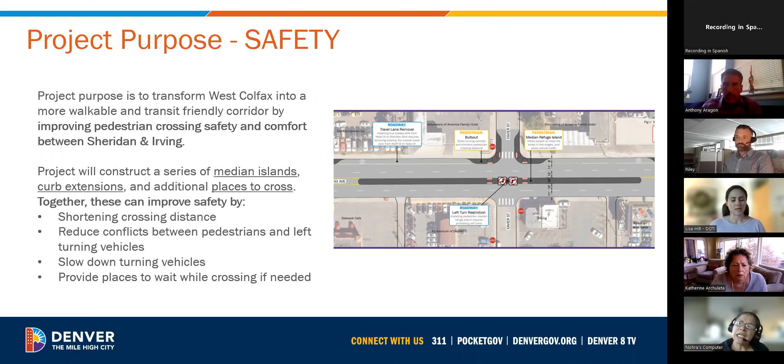All right, thank you, Lisa. Just double checking, did you want me to cover this slide as well? This was not one of the safety slides. Sorry, Mike, I thought you were going to go over that. I'll take it from here, I've looked at it so I can handle it. I'll apologize, I'll take it, sorry about that.

All right, yes, thanks, Lisa. My name is Mike King, and I'm on the Vision Zero team here at DOTI. For those that don't know what Vision Zero is, it's the goal of zero fatal and serious injuries on our streets by 2030. I'm sure you've seen the logo down in the corner there on many of our projects, and this is a project that is very much a Vision Zero project.

Right now this area is rapidly growing, and past community plans have called for a pedestrian-friendly walkable Main Street. Those being the NTMP projects, the neighborhood transportation mobility plans, and then the community transportation network projects as well. A lot of these area plans really focus on West Colfax as a major connection for the pedestrian network. We know there are schools, senior housing, residents, and businesses located along this corridor that generate pedestrian activity, as well as other roadway users.

And again, West Colfax is part of Denver's high injury network. High injury network being where 50% of our serious and fatal crashes happen across our city, while they only represent 5% of our total mileage across the city. So a very big difference there.

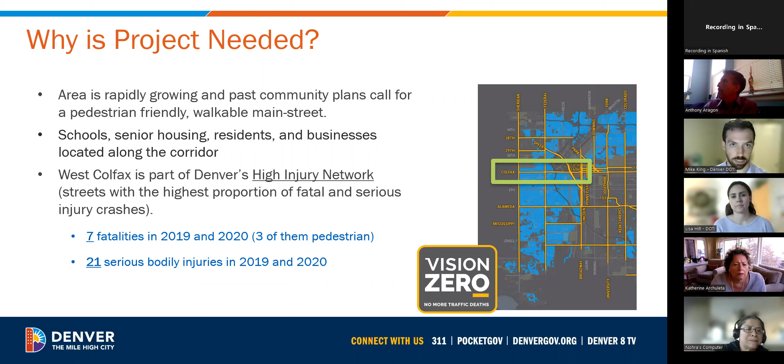Just a couple quick stats here, and then we'll get into the meat of the crash analysis. There have been 7 fatalities on this corridor in 2019 and 2020, 3 of them being pedestrian, and then 21 serious bodily injury crashes in 2019 and 2020. A serious bodily injury crash, for those that aren't aware, is a crash that usually results in hospitalization.

So again, this being a pedestrian project, we always want to make sure that we're focusing on pedestrians first on this type of project, but we also look at all roadway users.

Typically, when we do Vision Zero projects like this, if we see a specific intersection where there is a big issue, we would do a spot treatment. But because this is a full corridor trend where there's really almost a crash at every intersection, we want to do a full corridor analysis and a full corridor improvement.

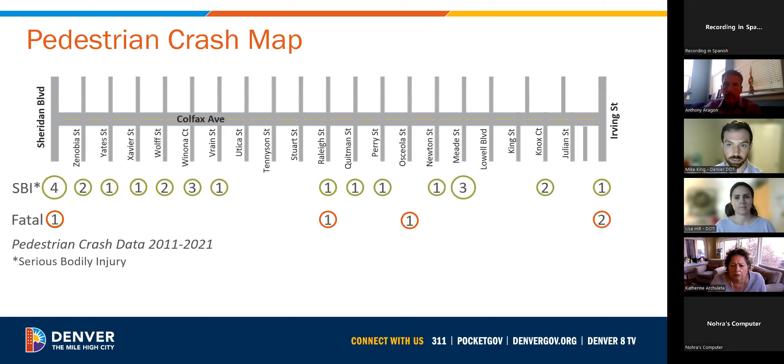Looking again at that larger crash picture, not just pedestrians, in that 2019 and 2020 window, there have been 131 total correctable crashes. A correctable crash is something that we could do engineering-wise that would eliminate or reduce this crash from happening in the future. Of those 131 total correctable crashes, we've seen 12 serious bodily injury and fatalities in that window, which gives us almost a 10% rate of crashes resulting in serious or fatal injuries. That is by far the highest rate in the city.

First, second is the federal stretch that we're doing a lot of projects on, and third is along Broadway, not Colorado Boulevard.

But just to break down this project specifically, there's been 94 vehicle-to-vehicle crashes, 14 pedestrian crashes, and 3 bicycle crashes.

I think this is our final slide for the crash picture, and then we can open it up for some questions if there are any about the crash picture.

This is just a snapshot of a specific stretch of the corridor. We do an analysis like this for all of our projects prior to determining what the best design treatments are. As you can see, we'll start from left to right, just what the crashes were that occurred in this stretch from Stuart to Quitman.

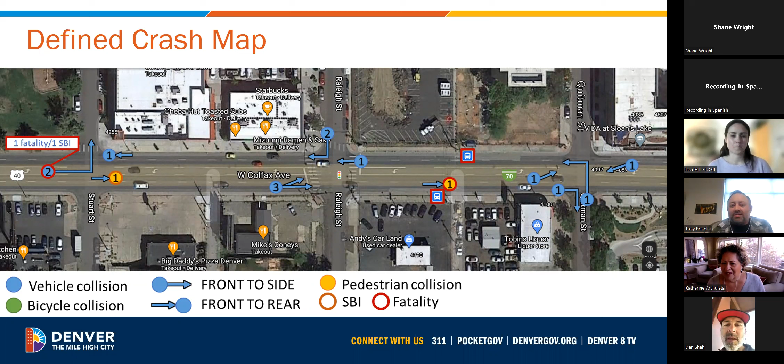Just in the interest of time, I'm going to move us on to the next slide because I know we have a lot to get through.

Shane, did we answer your question? Yes, thank you, I need to unlower my hand now. Okay. Thank you. All right, Mike, are you continuing? I'll pick back up. Okay, thanks, Lisa. Thank you, Mike, and sorry for putting you on the spot there.

You did great. So I just want to go over our timeline for this project again and remind everybody, this started planning back in June of 2019. We had public meeting number one, came out to the community to present the project, got some feedback. We developed a concept design in the middle of 2019. Came back to the public again in September of 2019 with another public meeting, got the remaining feedback, which was the basis for starting this project we're going into now.

In 2020, we got our remaining funding. Originally, our funding for design has come from the Elevate Denver Bond Initiative. Back in 2017, Denver citizens voted on funding safety and transit projects along West Colfax, so that's where funding came from through the Elevate Denver Bond Program. Then in 2020, the remaining funding was contributed by CDOT through their Safer Main Streets initiative. We applied for a grant and got a match from CDOT, so another partnership going on.

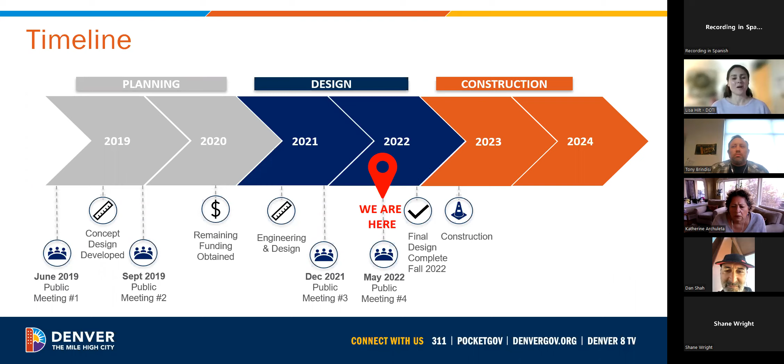This kind of put a little bit of a wrench in the Vision Zero project, and Mike's going to talk about that more later. Just the timing of the two projects doesn't quite line up now with our expedited schedule. It's great for the project, but our interim project kind of put a wrench in that.

So the key public input we heard from you all is that you had some concerns about pedestrian crossing safety at Corky Gonzales Library, Colfax Elementary, Newton and Vrain Streets. I want to point out at Irving Street, we're adding bulb outs. The project ends at the west side of the intersection of Irving and Colfax, and we're adding bulb outs there to help lessen crossing distances, which should improve safety.

Our other group had already implemented LPIs, lead pedestrian intervals, at the traffic signal intersections. That means the signal turns red, pedestrians get the walk signal to cross, and it takes a while for the green light to turn.

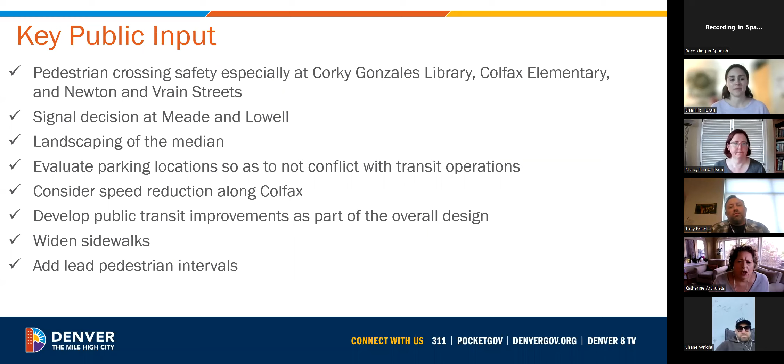Lisa, there was a question from Jerry about left-hand turns allowed at Lowell. It might relate a bit to the earlier conversation, but maybe you could address it now. I was just going to say we have a slide on that later, Katherine. Okay, great, perfect. I'll probably address a few of these comments at that point, and we can always go back to them if we don't cover enough detail. And thanks, Shane, for your comment about feeling great on the landscaping.

I had one question about the process. There are a number of things you've done over time that have been responsive to input from the BID and its members. But one thing we asked about was having speed indicator lights or signs that tell people how fast they're going, for that instant recognition that you need to slow down. I wondered if those had been incorporated into your design.

Thanks for the question, Dan. I think we've covered this before. Those aren't part of our design, and I believe that's something that has to go through DPD. Maybe Tony can speak more on this. I can speak a little to that, Lisa, though probably not too in depth right now since it hasn't been part of this discussion or design at this point.

There is a process to go through. DPD essentially has to make certain requests in alignment with the red light cameras on CDOT right of way. Certain things right now aren't really allowed, like the feedback signs, is kind of what they are, Dan.

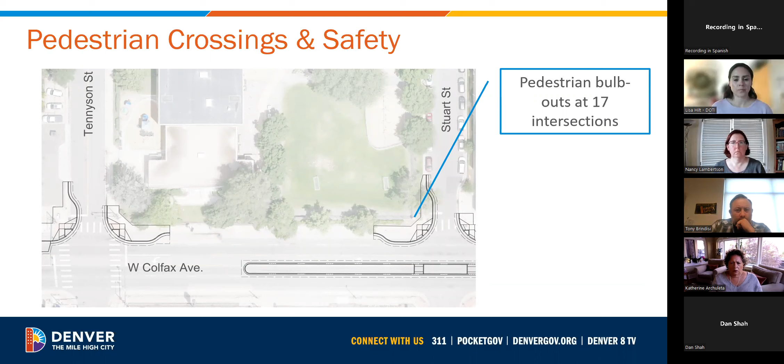We are adding 8 new landscape median refuge islands, and with this we're preventing over 60 left turn conflicts between pedestrians and vehicles. So this is a great safety tool.

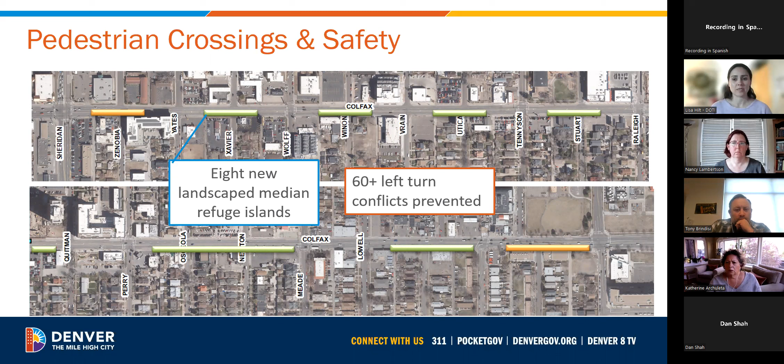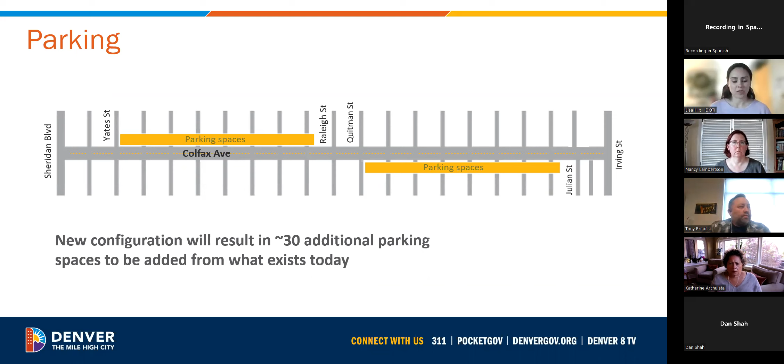We'll also be adding about 30 additional parking spaces from what exists today. So you can see it starts on the north side from Yates to about Raleigh, then there's a transition, and then we have parking spaces on the south side. We'll be adding parking to the area, and I think that will help people get to where they need to go, and businesses as well -- added parking for businesses.

Just a reminder of our transit improvements: we are also adding bus bulb outs, which will create additional waiting areas where we add the bus bulb-out stops. This will consolidate and reduce travel time for transit. And we have traffic signal priority, which gives special signals to get buses through the corridor more quickly. So that's a big benefit to keep people on time, keep the buses running, and keep things moving.

There was one question from Kathleen that may be relevant to this slide: she's asking if there will be relocation or removal of RTD shelters that are no longer at bus stops, and whether anything is being done to ensure businesses are diligent in removing snow from sidewalks during the winter months.

Sure, as far as RTD shelters where we're consolidating bus stops, yes, I believe those will be removed. And as far as diligence in having businesses...

Lisa, just start, go ahead. Yeah, I just wanted to interject on the bus shelter.

Those are all actually Business Improvement District shelters, so we've been coordinating with property owners, RTD, the city, and Riley to move them. There's actually one currently orphaned at Irving because they eliminated the 16L, but we do have plans to relocate that one and also the one at Raleigh eastbound. Those shelters will be moved so they're no longer serving no purpose. The one at Raleigh will move over in front of the McDonald's. The one at Irving will move to the other side of Irving, on the west side, in our landscape area, once the bulb out is built there.

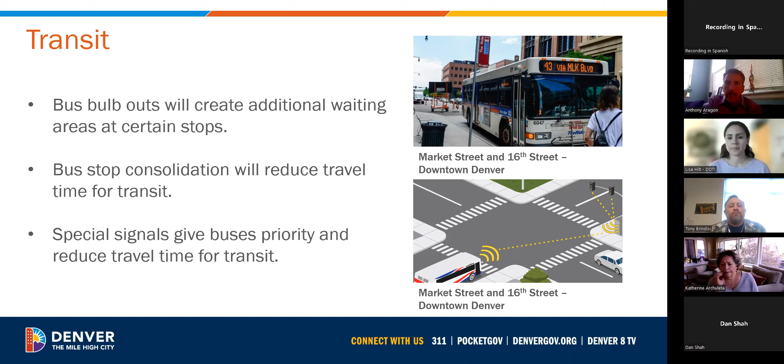The question was how does parking work with BRT or regular movement along the outside lanes. In areas of the street where there is on-street parking, the bus is able to stop at one of the bus bulb outs and not have to pull out of traffic, which reduces delay. Transit operations sometimes see delay when they have to pull out of traffic and pull back in, so the bus bulb outs will benefit that.

As far as BRT goes, which stands for Bus Rapid Transit, right now what's being done as part of this project are improvements to make transit quicker. It's not full bus rapid transit yet; that's planned for the future. When that does happen, it would likely remove one of the travel lanes, similar to what's happening on East Colfax, where you'd have a vehicle lane and then a dedicated lane for bus operations.

On the snow issue, I want to jump in because one of the reasons the on-street parking was moved and shifted, starting at Perry, was to mitigate the splashback onto the south side businesses. It becomes hard for those business owners to keep things ice-free when there's splashback. By having parking in front of the businesses on the south side, for example across from the Rose Lady, it'll be easier for them not to deal with constant splashback of ice and snow, and easier to maintain the walks in a safe condition.

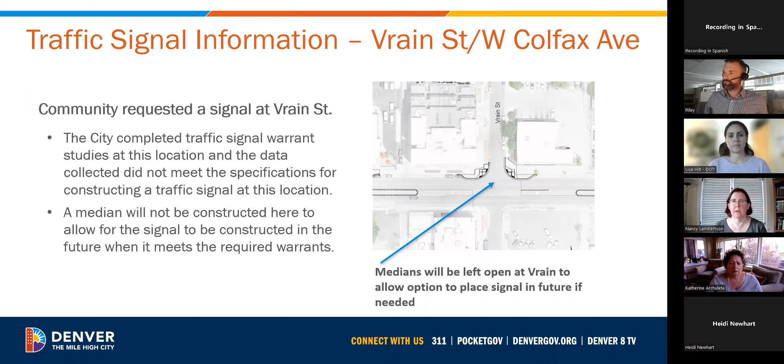Same thing at Lowell, same issue as at Vrain, where people were asking to relocate the signal from Meade to Lowell. The city typically doesn't do that because of the potential to damage the signal. Once again, it did not meet warrants, but DOTI is committed to monitoring these locations to see in the future when they should be installing signals.

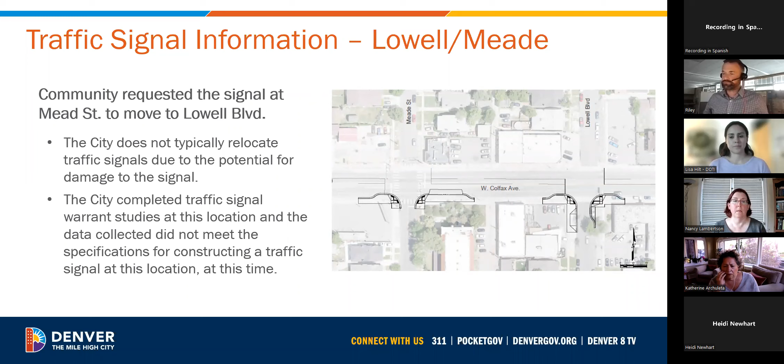One change, after talking with CDOT following our 30% design and some safety concerns we'd identified, we will have a median installed at Lowell. Someone asked earlier about being able to turn left, and this median won't prevent DOTI from constructing a signal when the warrants are met. You will be allowed to turn left off of Colfax, either northbound or southbound onto Lowell, but you will not be allowed to turn left from Lowell onto Colfax. So this is a change.

One other thing I wanted to highlight is on the south side of the street, you'll notice the curb and gutters look a little wider than what we were showing before. After a lot of conversation with CDOT, who has been a great partner in this project, making sure we had the appropriate lane widths for buses but also that we could fit in landscaping, one design change is that on both sides where we're putting in bulb outs, we'll be doing 5-foot gutters, which is what's out there now. That'll provide a better running surface for the buses in those outside lanes, give us the lane widths needed for everyone to be safe, and provide the width for the landscaping, which was a huge win for this project overall.

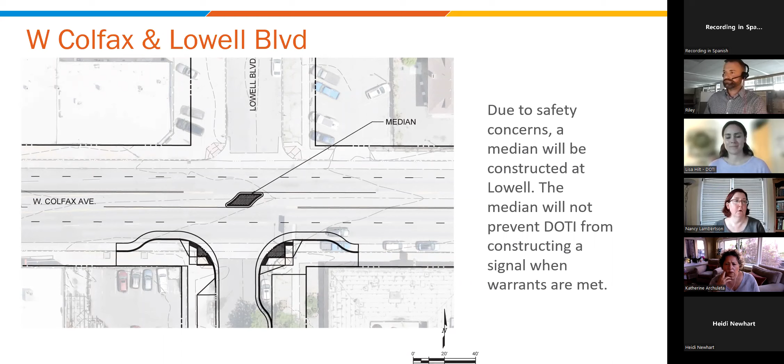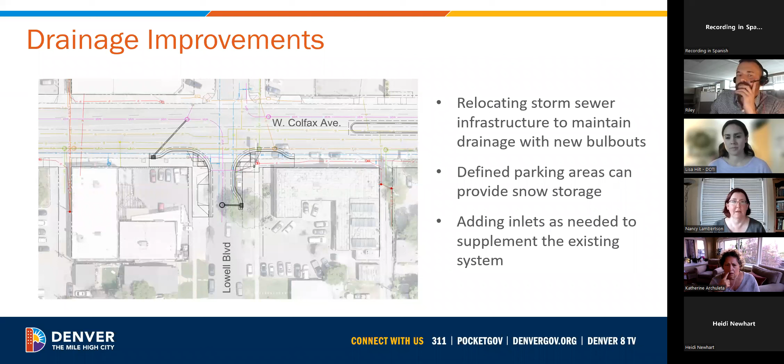Just a little bit on drainage, and Lauren Winnan will be talking more specifically later about the Stuart project. We'll be looking at relocating storm sewer infrastructure to maintain drainage with the new bulb outs, making sure water flows away from the curb ramps—no one likes to step in a puddle at the bottom of a curb ramp. Also, near the defined parking areas Lisa mentioned earlier, we'll provide some areas for snow storage so it's not piled up on the sidewalk, which should help with snow and icing issues. We're also adding inlets as needed to supplement the existing system, making sure we maintain existing drainage and don't create any pools, or what we like to call bird baths.

Colfax and Irving—another discussion with our partners at CDOT. As you all know, going through that intersection now, the lanes don't necessarily line up. So we are changing the existing median and some of the striping so that the lanes, both eastbound and westbound, line up across the intersection. It'll be easier for drivers to navigate and make sure they're in the appropriate lane once they get across.

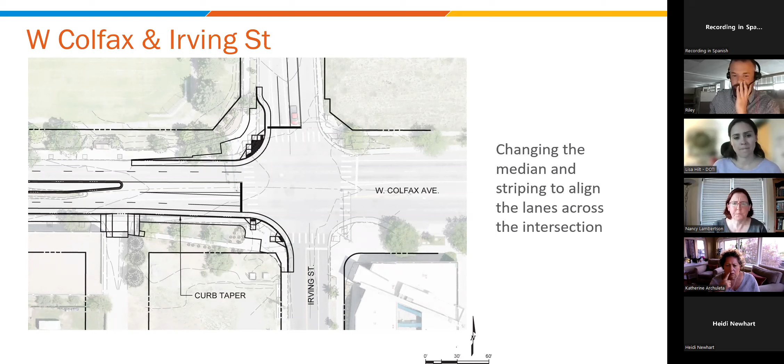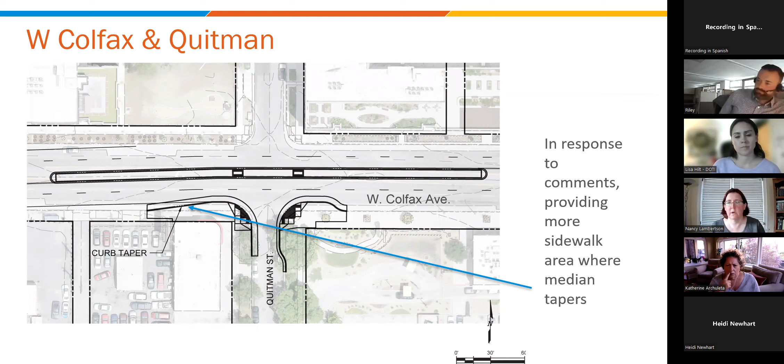Go back one more, sorry. This is a case where on the north side we're bulbing out a little and adding some sidewalk, and same thing on the next slide, where we're tapering the parking from the north side to the south side over by Quitman. People asked for a little more sidewalk in these areas where the tapers are, so we've pulled the curb and gutter out into the roadway a bit, providing wider sidewalks as requested.

Maybe some trees, some planting, a few stone slabs and treatments like that in the median, just to get obviously aesthetics, but also comfort and feel as you're traversing the corridor. And then I think the next slide shows a little bit - you can see on the left we have a parking area, and there's a bulb-out where there's a little bit more area for bikes and peds to wait, and then the refuge area going out into the median.

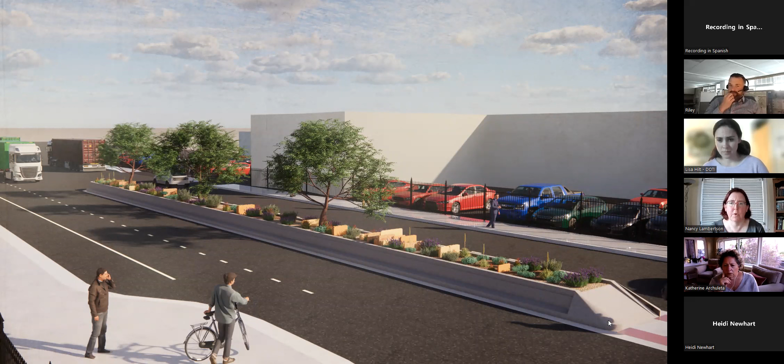Hopefully too, this design process, going back to some of the comments earlier, by putting in a median we create a visual cue to help slow down traffic in this area, knowing that this is a safety project. So I'll leave it for a discussion break, but that's kind of a big overall response to the comments we received at our last couple of meetings.

One of the questions we're seeing in the chat by several people is about the construction schedule and how that will be timed. Is it going to be in segments, and what time of day? Can you talk about that?

I'm going to have to default to Lisa. I think it would mostly be day construction, with some consideration for residences close to Colfax - night construction can be pretty disturbing in that regard. We're looking at starting construction probably earlier spring of 2023, and a year and a half, give or take, through 2024 is the timeline we're looking for as far as a time frame. But if you wanted to add to that, Lisa.

Yeah, construction will likely be phased, so we're not going to rip up the whole entire section of Colfax at once. Rest assured of that. It's not anticipated that this will be night work for construction - that can change, but we do not anticipate night work.

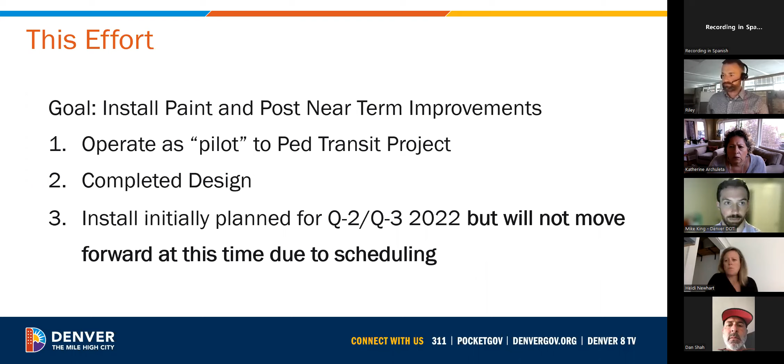We made the executive decision that this money was better spent elsewhere, and it won't just go right back into the full DOTI budget. It will go back into the Vision Zero pedestrian improvement project. So in the long run, this is very much a big win. The longer term project is going in, and we will get more projects across the city that are going to help pedestrians across the board.

Just to reiterate that timeline too, obviously we're here in May. We would have gotten this project installed around the September timeframe. Even if we wanted to use it as a pilot, only having 2 months between that September timeframe and final design doesn't really help us that much for the long-term project either. Construction would start right back up at the beginning of 2023.

So to add on to the construction conversation, that's a little bit less construction that will have to happen on the corridor. All good news in the long run for the most part. Our team was a little bummed at first, but then I realized how great it is now that we get this longer term project. So we're very excited to see this project get in sooner.

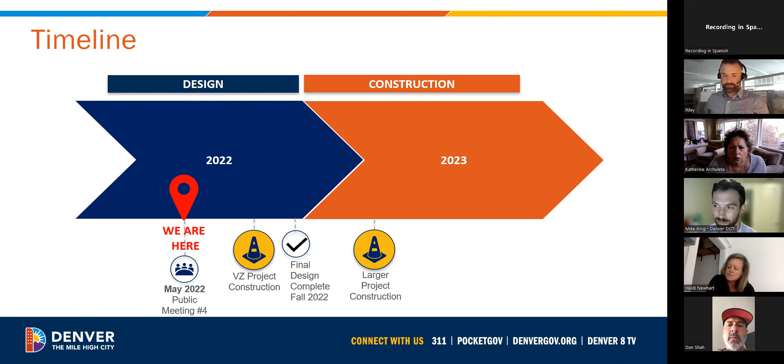Thanks, Katherine. We're going to actually push the Stuart Street project to June. So if you are interested in learning more about the Stuart Street project, definitely join us for the June 2nd CAG meeting. This project is a storm drain project from Colfax to Dry Gulch that'll be in construction the end of this year and in 2023. So if you're interested in learning about that one, definitely come in or tune in June and hear about it.

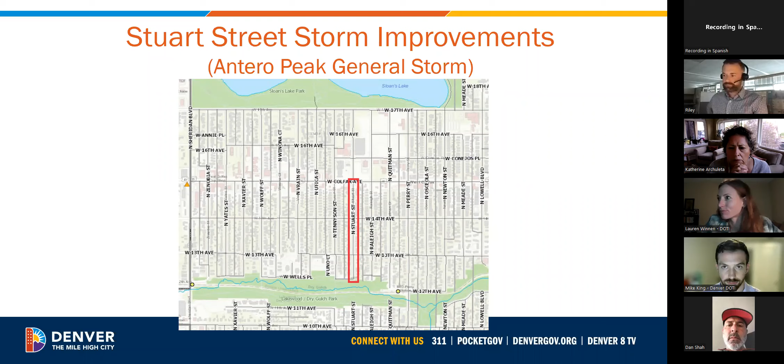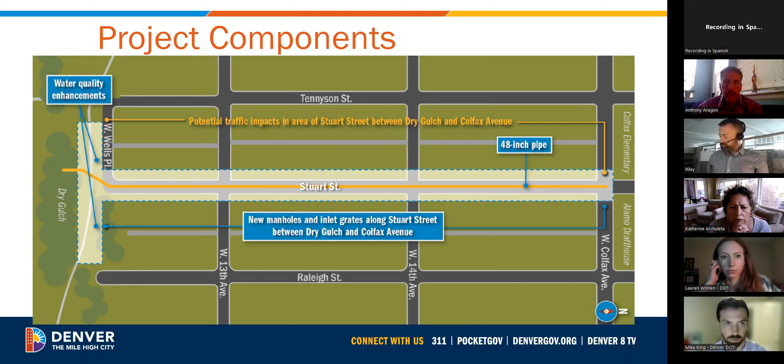Also, for those participants, we will add this Stuart Street Storm Project on the West Area Projects website, and it will have its own project page so you'll be able to keep up to date. But by no means is the June presentation the only opportunity to hear about the project. We will invite Lauren to other CAG meetings in the coming months, as well as community meetings.